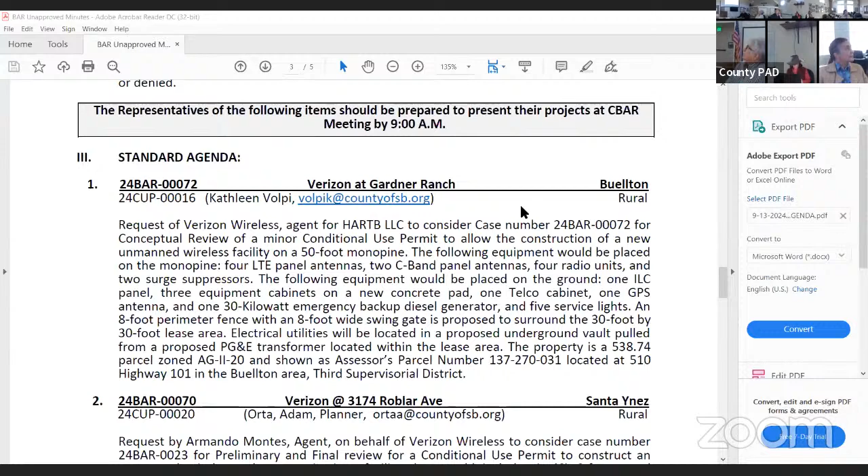Do we have anybody here for that? There's got to be somebody online, because there ain't nobody in the room but us. Armando, good afternoon, or sorry, good morning everyone. Armando's here, agent for the project. Perfect, all right, I will go ahead and kick it off.

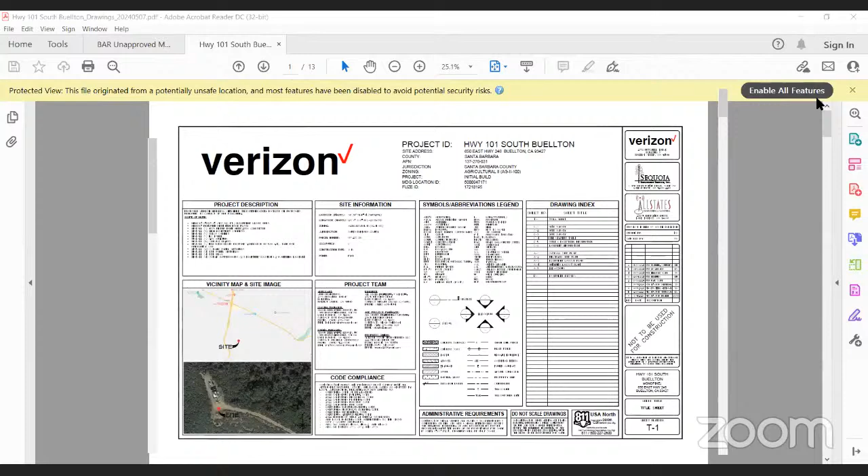My name is Armando Montes with Sequoia Deployment Services, representing the applicant Verizon Wireless. Verizon is proposing a new wireless telecommunications facility at 650 East Highway 246 in Buellton. The proposed project is located roughly at the southwestern portion of the property. Access to the site comes from an existing access road that begins at the northeast portion of the property and makes its way up the hill.

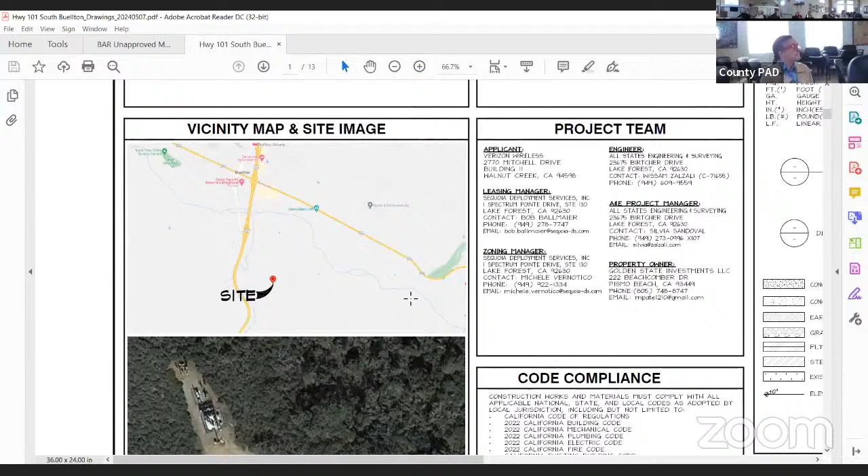The facility itself is designed as a 3-sector, 50-foot tall monopine that will sit in a 27-foot by 28.5-foot equipment lease area, securely enclosed by an 8-foot tall chain link fence. The objective of this project is to improve the overall network coverage and capacity in the surrounding rural areas. That pretty much concludes my brief presentation, and I'm open to any questions you guys may have.

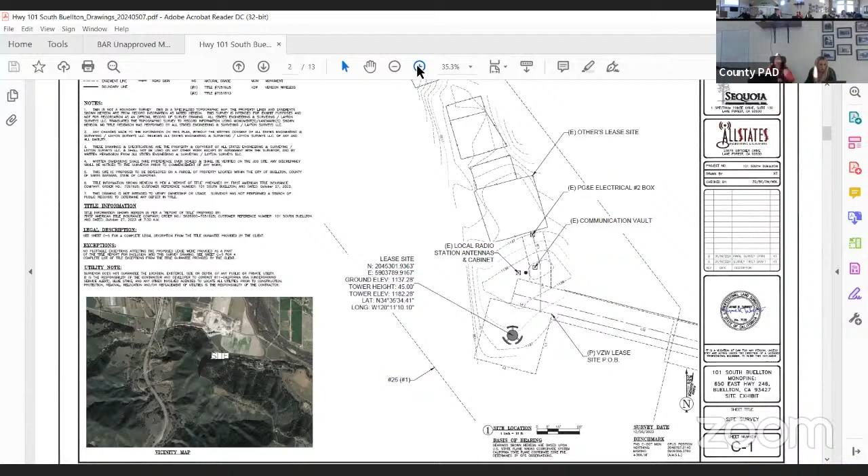Let's go to the different pages. On the next page, although the word 'site' is highlighted in white, that's not the actual site. It's hard to see the black arrow, but right there is where it's pointing out the site. Yep, okay, so zoom back out, and then that's good. And then go to the next page, and the next one, scroll down a little ways, and you get into where it is on the site, keep going.

There, so that's the access road he spoke of. Next is the actual site. Now there are other enclosures up here for other providers. Yeah, there's other carriers up on this hill.

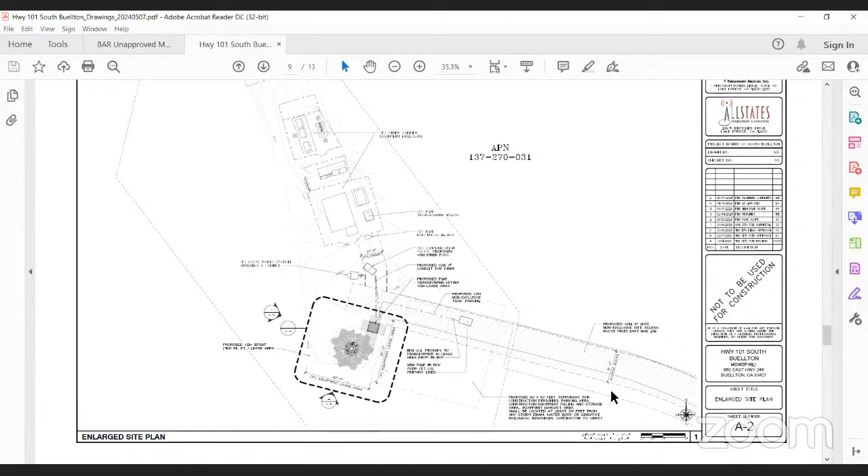And those are single poles, they're not a monopine, correct? Correct, yeah, they're more like a popsicle stick design, kind of, not a single structure monopine as this one. Okay, and how tall are those other ones?

I don't think we captured them. I want to say they're probably like 20 feet tall at the most, just going off of pictures I had seen.

Okay, and your structure to the very top, to the top of the panels, is like 45 feet, and then the actual monopine is 50, correct? That's correct. Okay, do you also represent the other Verizon project that we're seeing today?

Yeah, I am. Okay, so you're familiar with our comments about the fencing and the lighting and all of that? Because we're gonna have exactly the same comments, probably.

Okay, is there anything else? Do you have pictures from 246 or anything that shows the site, or any pictures of the site? We do have photo simulations we provided. I think most of those views are off of 101. And then we did have some additional site photos we provided. I think a couple of those did capture from 246.

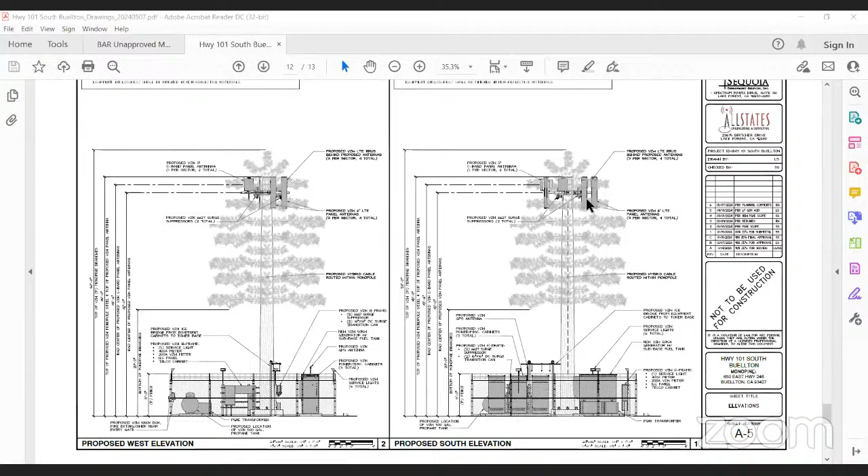Sorry to interrupt you. Is there any email address or someone I can email the sims and the photos to at this time, or is it too late? It's conceptual and if it is further information, we can look at it.

Oh, yeah, well, if you can, you can go ahead and send it to me, Armando. Okay, do you have my email address? Is this Teresa? Yes. Yeah, I have your email. Okay, send it to her real quick. Of course, just do that right away.

All right, so we're gonna temporarily table item number 1, and we're gonna go to item number 2, 24 bar 70, Verizon at 3174 Roblar Avenue. I'm just gonna give 2 shakes here, go ahead and get your stuff up.

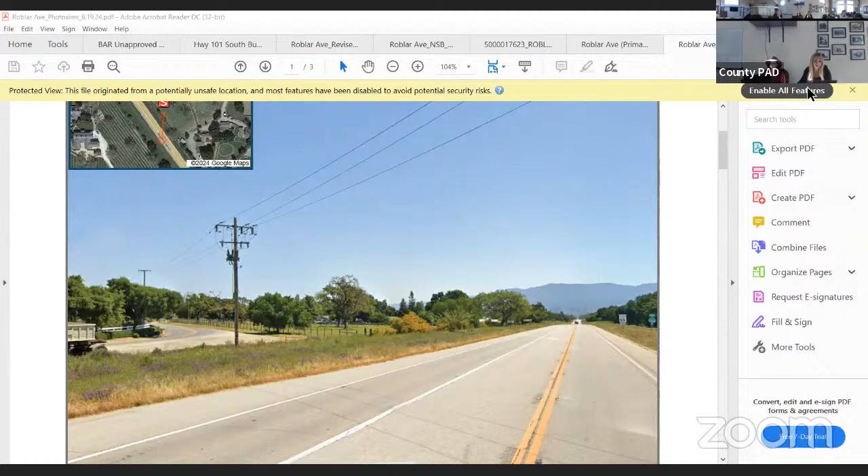All right, I'll look at this one. Okay, sir, would you go ahead and just address the comments from last time? Do you want me to read them?

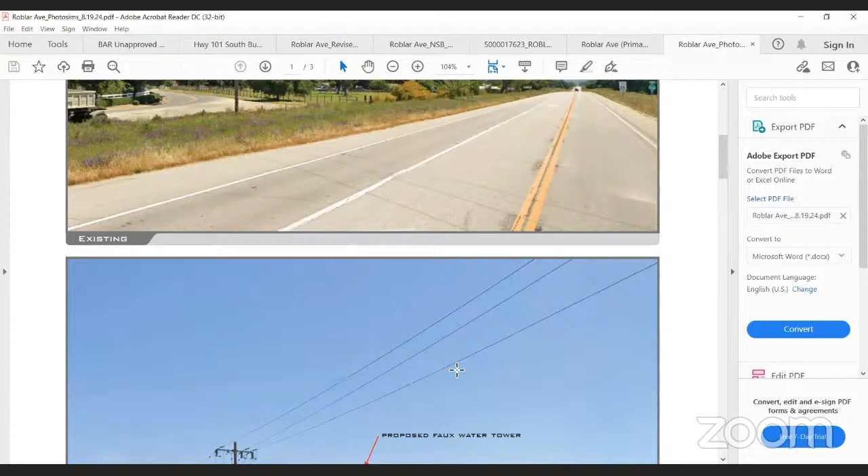Yeah, so I believe for this project, this is a faux water tank. The comments we received last time, BAR wanted to see a specific color palette, kind of break up the just brown that we had everywhere. So we incorporated some cast brown into the tank, like we had shown in some of our previous examples. Yeah, so you see the cast brown, and then I forget what the gray is called. It's on the drawings though. Okay, we'll take a look at the drawings in a minute. Okay, yeah, so we kind of broke it up, like I mentioned, different colors.

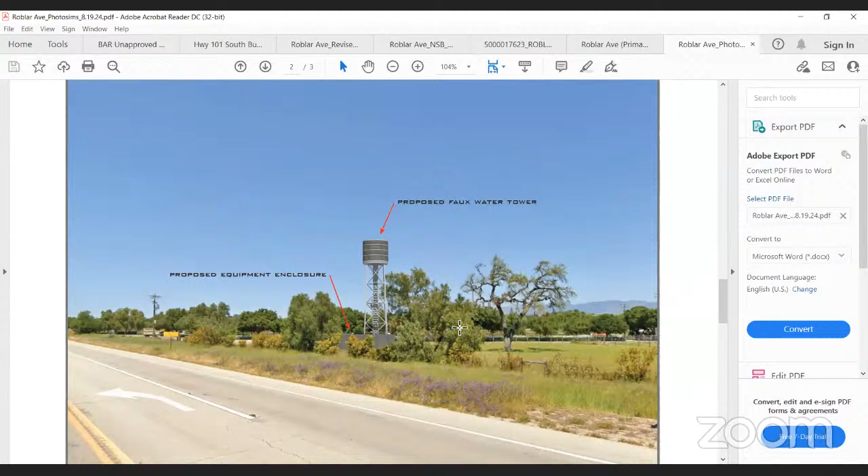The fencing, we brought down the lighting as requested, so it no longer protrudes to the top, it's all tucked in below. And we did look at the center pipe. I know there were some questions regarding that. We had our engineers design it as thin as possible, and I think we made a call-out on the drawings to ensure that, when it comes to actually selecting or ordering the equipment from the vendor, that we do go with the smallest possible piping in the middle, so it's not such a large contrast from the supporting legs. And yes, that's pretty much, I think, those are the main comments we had seen the last time.

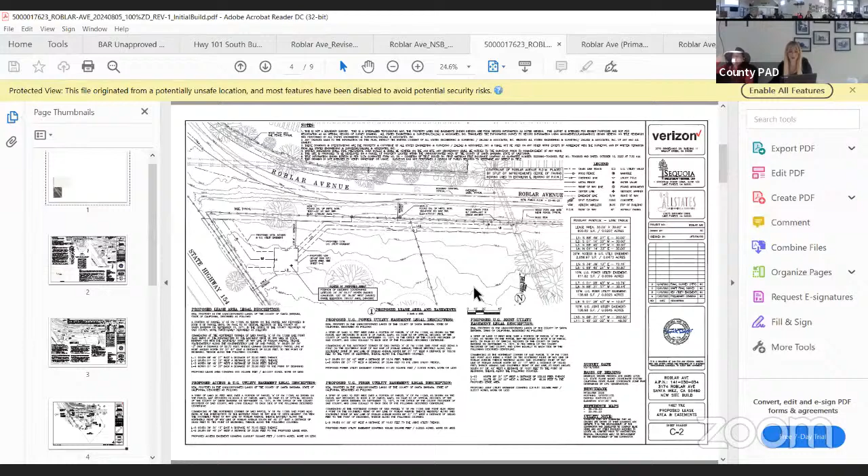Well, that was a good one. Okay, we can see where it is. Everybody's familiar with the site. Scroll down.

Okay, one more, and then go ahead and go to the elevations. Keep going. There we go.

I believe one of the other comments too was on the elevation sheet, you guys wanted to see what the fencing would look like, not make it transparent, so we could see the equipment, what it would actually look like at the site. So that's why you're not seeing any of the cabinets that are behind the fence, or even the lights, because we are bringing them lower. We asked you to show the fence post on the exterior and it looks like you've done that.

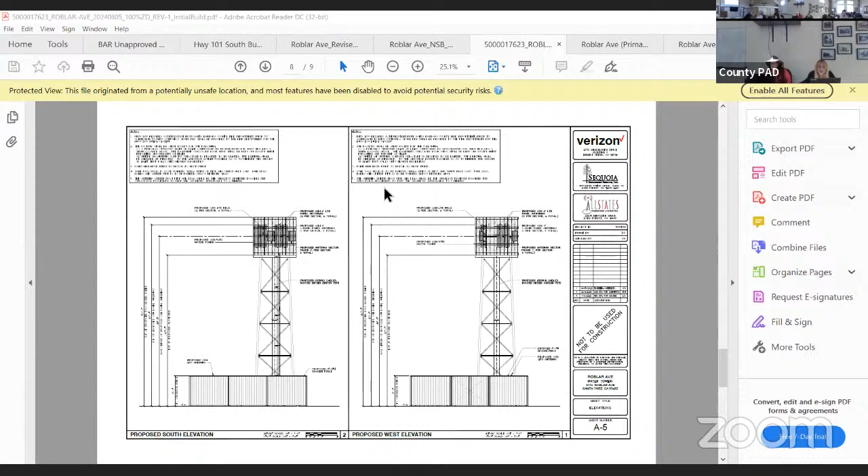Did you have rendered elevations or are those only in your sims? I'm sorry, what was that? The last note was, in addition to provided elevations, add rendered versions of the same elevations. Is that what you've done in the simulations? Yes.

And to be clear, it looks like the fence posts are on the outside in elevation, but not in plan. Well, that's a good catch. I think what they did was they just put applied something, planks on the outside to make it look like fence posts. Got it. Actually, and that's interesting, because that's the same hatch as what, it's like a line type. Yeah, I think that's just what it is.

So, yeah, can you go up to the plan? We have a quick question, do you have a detail of the fence? Do we have a detail of the fence? I don't believe we do. I know we called out this as being a wooden fence.

And do we call out the color of the fence? Yeah, we just called out that the new wood fence is gonna match the existing wood fence on the property, so I think we're still going more of a brown color there. Is there the wood fence on the property is not, it's post and wire. So you can't match it, unless I'm totally missing the obvious. That's true. Yeah, I may have misspoken on that.

Okay, so I think we need a detail of your fence and the gate. Do both at the same time, cause you're gonna need that to construct it anyway. And you see, looking at this plan, you see Andrew's comment about, it looks like there are fence posts on the inside. Okay, so you need to bring your plans into conformance, actually show where your posts are gonna be and how they're gonna appear in plan.

And then you need to call out what materials they are and what colors. This all goes back to comment number 1, which is need to see a materials board. So in addition to having your colors and everything called out on the plan, you need a board that just shows, this is the color, this is a paint chip sample for the color of the 2 colors on the tower. This is the paint chip sample for the color on the fence, if you're gonna paint it, or whatever you're gonna do with it. Your planner can work with you, so you know what a color board is like, because the color board will be stamped here.

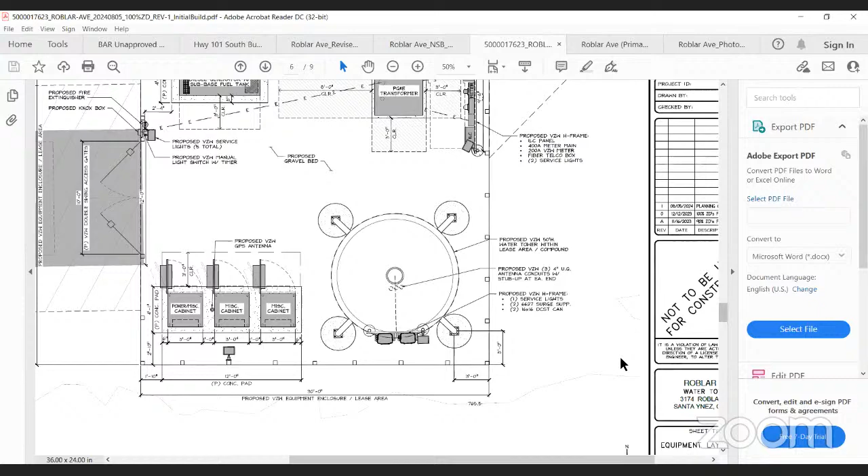There you go. Okay, so we'll have that color to review. On just note number 4, it says center pipe tank legs to be painted a network gray color. It's the same gray. Okay, so yeah, those color chips and all that need to just be put on a color board.

So talk to your planner about that, for your materials color board. We had a materials board we submitted last time. That's how we got the paint samples for the tank and the legs. I think the only thing we're probably missing is, you can add to it, and then take a picture of it and submit that as well. And that'll satisfy it for us.

And then we'll be able to see that. I think he should come back final on consent with the detail and the color board. Everybody okay with that? Yeah. All right, so I'd like to make a motion for preliminary approval, final on consent.

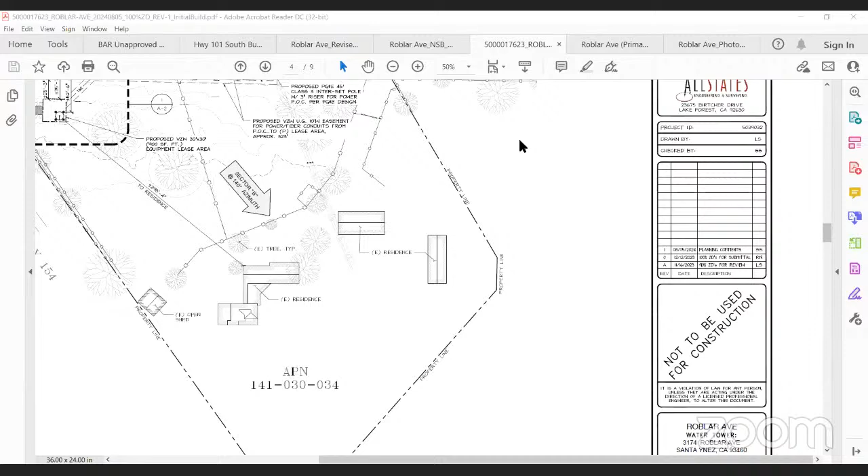Hey, yeah, Adam Orta from P&D here. Just wanted to point out to the chair and the board, we did call this application incomplete for a second time, and I just want to bring up a couple of things your board might be interested in or could speak to. As you can see, the project is quite visible from the north and southeast view from Highway 154. If you want to pull up the sim, Teresa, you can follow along with what I'm saying.

And so while tier 3 telecom towers don't necessarily require landscaping, county staff still have to make findings that these facilities are adequately screened from public viewing areas. As you guys already know, 154 is a scenic highway, so screening is particularly important for these facilities. So I just want to ask and bring to the chair and board's attention whether landscaping would be considered for additional screening. That's our first question, and two, along the lines of screening and placement from visibility from public viewing areas.

We also asked the applicant to better provide additional analysis regarding alternative site locations on the property itself. We think the applicant did a great job providing justification of why this site in particular was chosen. However, staff wants to see better explanation of why this particular location on the corner of the property was chosen. I believe in some of the materials the agent provided, this was preferred by the owner to have it in this corner of the property. But as I mentioned, it's a highly visible corner coming both from the north and southeast sides from 154. So I just wanted to bring that to the chair and board's attention for further consideration on screening. That's all I got.

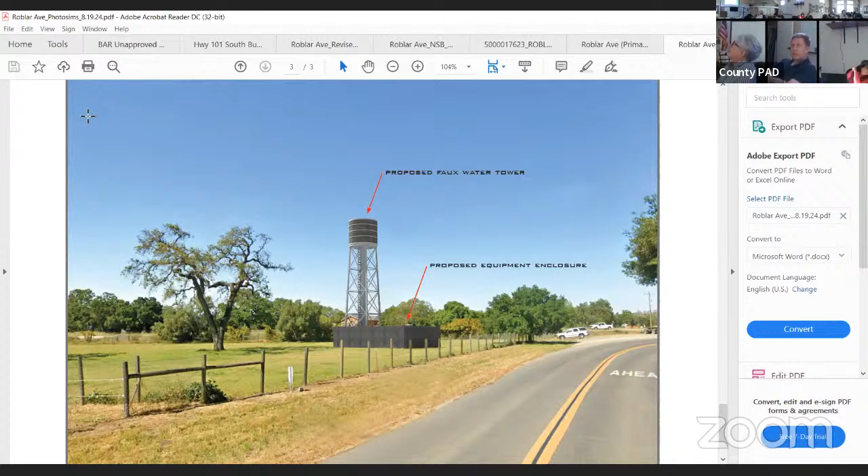Happy to answer any questions. So there's two questions there, and the first is additional screening required. Well, first the second question was alternative sites. Yes. So first I'd like to know what other alternative sites were considered. If you go to the primary doc. It's pretty extensive. Scroll down. And they were just eliminated. Yeah, there are a bunch of them.

So, Armando, you're the agent, correct? Hi, guys. Yeah, right. Okay, so this is the second question, which goes to alternative sites, and the first part was, in this document, you basically indicated that the red pins are properties whom you spoke to who didn't want this on their property. I think there was one that you couldn't come to an agreement with because the lease was too expensive. But other than that, they were all no's, is that correct? That's correct.

Okay, so within this parcel, can you zoom in on this? Let's go, yeah, okay. What is actually the parcel here? Is it the triangle, the whole triangle? No, it's bigger than that. What do I call this? Does it go all the way down there to the red pin and then down to the road and back to 154?

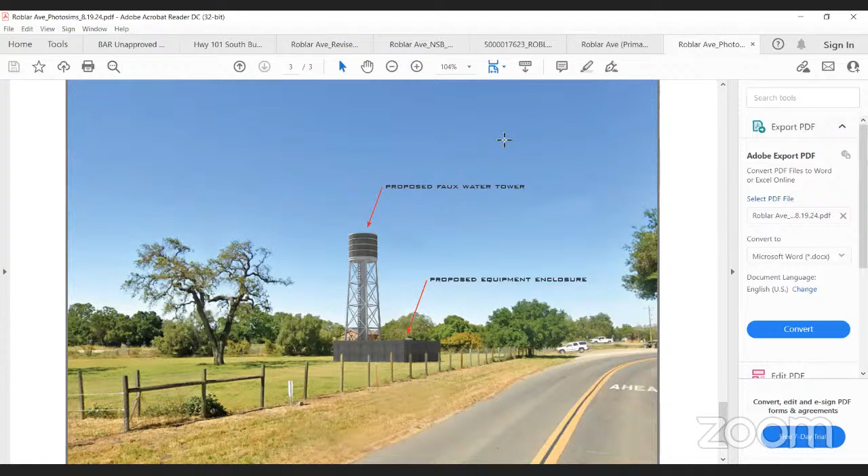Is one of your previous, yeah, we've seen this, it kind of looks a little more water-towery. Where is that, that was last time? Sample, yeah, it was in the photos from the material board we sent over, the digital material board. Yeah, I saw it on the submittal too. To me it looks more appropriate, like it's actually sitting on something, like it's really a water tank sitting on something.

This seems like it's not supported if it was really water in it. Well, the balance of the board didn't feel the platform fit what we wanted, because there was a note here that says one member thinks the platform below the water tank is desired as shown in the example. Like me, I think I was. It probably was, but everybody else was not hip on the platform.

It's just the proportions somehow. Yeah, it just seemed, but I'm okay with it as it is. Just, we'll go to the materials board. There isn't one. Yeah, there is. What's the diameter of the tank?

Just real quick, we have photo simulations, we have plans, we have the alternative sites mentioned, and we have some pictures there from the site. Right there.

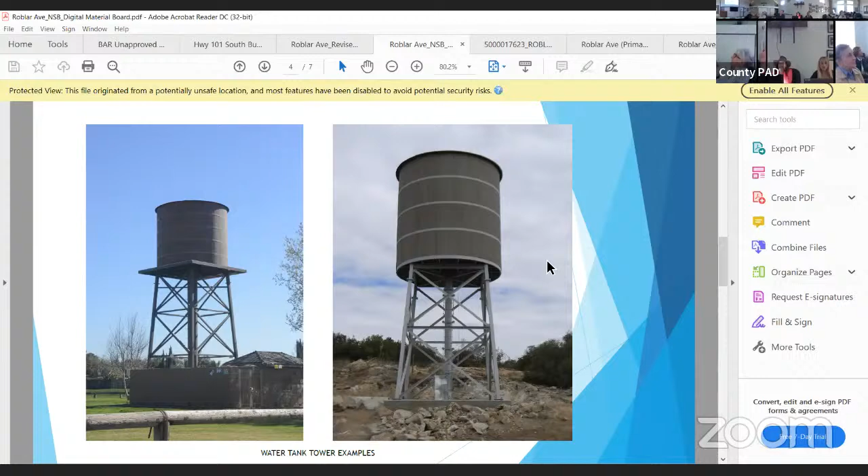Yeah, well, but even the one on the right, see how it hangs over? Yeah, that's what I'm talking about. But if you go to the elevation, it does that. If you look at sheet A5 on page 8, it does that.

Oh, it does do that. It doesn't come through in the photo sims, but it does in the actual drawing. Yeah, they didn't do it the right way in the photo sims. There we go, ah, okay, yeah, then I have no problem with it. We're good then, if they build it like that, the actual drawing. Okay, so the photo sim look is a fallacy, all right, discard the photo sims.

Okay, so we've addressed Adam's comment. Adam, I think we addressed the comment, we don't think we should add additional landscaping that's, in our view, probably going to die. Okay, that's no problem, thank you guys. And as far as alternative sites on this property itself, we don't really see a standout alternative based on what we have before us.

Okay, great. I just wanted to bring those two to you guys' consideration. I appreciate it, no worries. And thanks for asking.

Back to my motion and the fact that they need to come back. If we follow through with the motion, they would need to return with the color board and all colors called out on the plan, and the plans need to match the details, which they're also to provide for the fence. Very nice job on lowering the lights and changing the colors, that all looks good. So that's what you need to come back with.

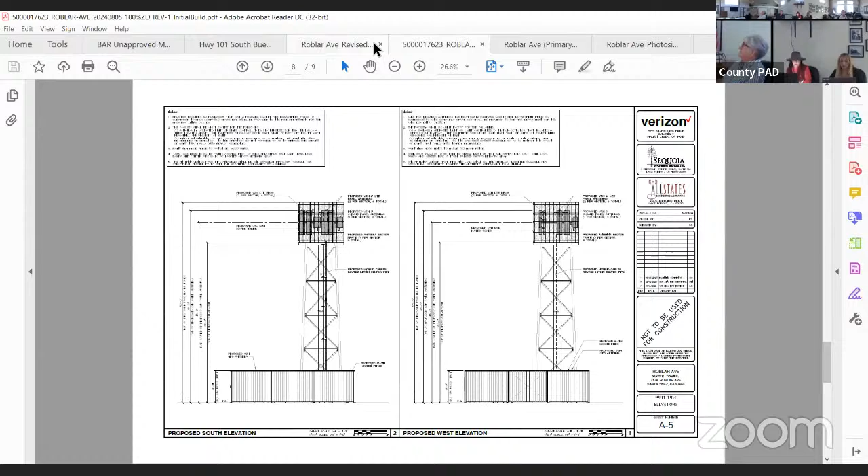more agrarian style fence, or is this acceptable? I think this is the minimum of acceptability. Just look at some solid wood fences and agrarian styles and see what they can do. This would be just fine if they detailed it, with the posts, making sure the posts show on the exterior. They're gonna need bracing on that gate, so whether they make it aesthetic or it's all internal, it's up to them.

So whatever they come up with, we'll look at. Okay, thank you. So, going back to item number 1, did you get the email? Which is Verizon at Gardner Ranch.

Okay, Armando, you want to orient us here? This first view is from 101. As you see right here, top photo, existing, and on the top of the hill, those are the existing cell sites right there, the antennas.

Okay, scroll down a little. We rest our case, we have our lonely tree on top. No further discussion needed. Is this the only thing he sent you?

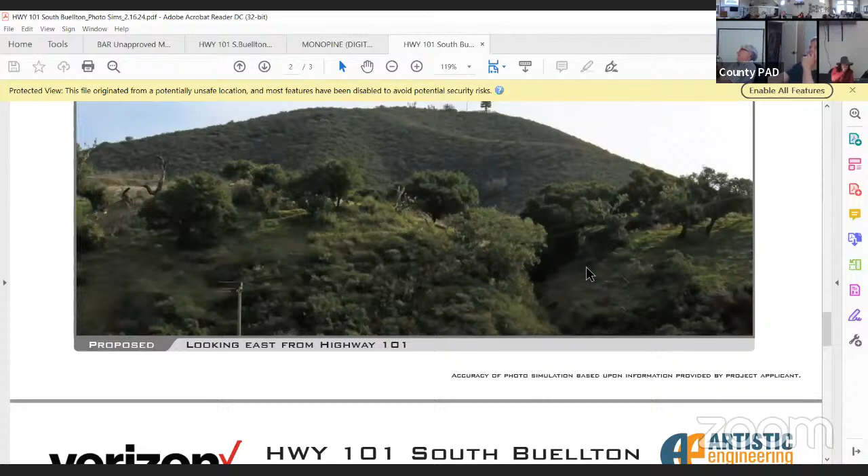Also from 101. Yeah, it's just like, oh man. You want me to do what? Why am I doing this? Okay.

I'm interested in what it would look like from 246 as well. And I'm a little interested in how this interacts with, it's from Highway 246 East, so you can't see it, that's the entrance though, right? Yes, so that's the entrance, it zigs all the way up, we're that hill in the far distance. I think it's probably why we didn't provide sims from 246, just because it's so far.

Yeah, it's pretty far away. That doesn't look like 246, that looks like 101, where is that on 246? Let's see here, I don't think I had a map legend on this. That's definitely 101, you don't have one-way signs on 246, it's not a divided road. Yeah, it could have been mislabeled on our end, so I apologize for that.

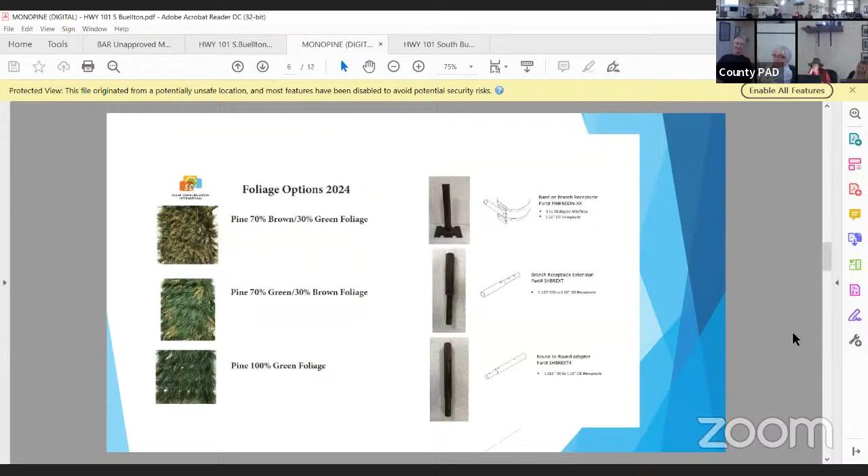Yeah, we're looking for a regular pole. In this case, we don't want it to look like a telephone pole, so we don't necessarily want it to be dark. I think they might be better off going with some kind of neutrally colored, anodized gray finish. We've usually done galvanized, non-reflective.

But we're gonna want samples of the material on your sample board. Basically what we're looking for is non-reflective or as non-reflective as possible. We usually put a detail galvanized with a low finish. I could bring examples of what that would look like. I'm trying to think of a material word for that - might be a little difficult. We'll look through other sites we've built with that detail and present it.

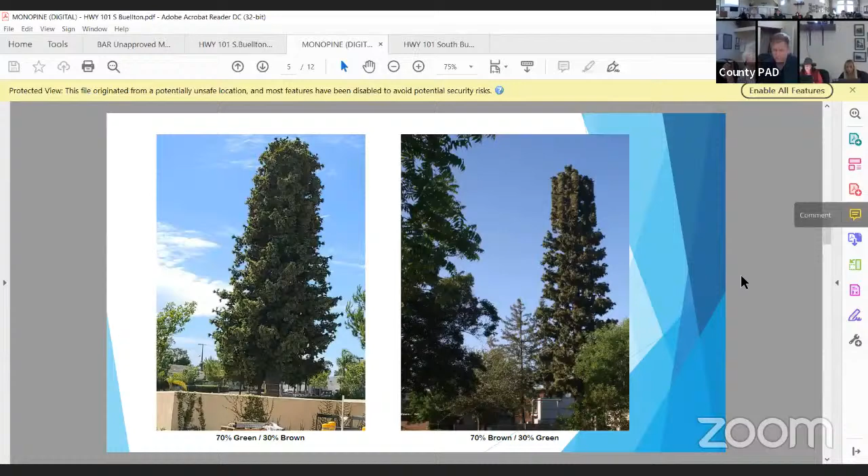Okay, can we look at the site plans on this one? And the galvanized fence was okay with everybody and everything.

It would be nice to know that the lights were on a timer or some other motion sensor, since you get deer and things going by. Everything on the interior, not just the interior - the lights, yeah. But no deer going inside. Motion is usually only set for a certain amount of time, so we should have a note on the drawings mentioning the service lights being on a timer. Okay, that's fine, that's mostly what I wanted to know. Okay, that sounds fine. So we're good with everything else?

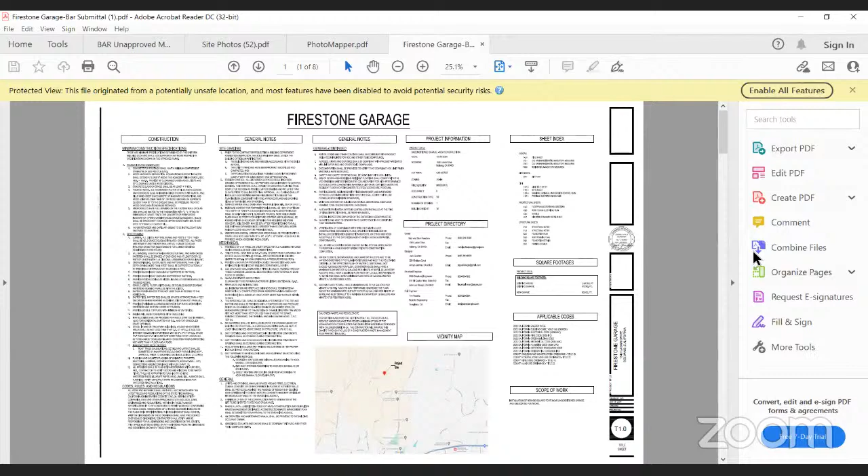We are proposing a detached 960 square foot 3-car garage next to their existing garage and residence on their 5-acre parcel. The garage is about 15 feet in height from looking at the elevations. You guys have the drawings? Okay, we'll get there in a sec. You're talking about right in here, right?

That's correct, yep. Okay, so go to the drawings. That's the site photos. Oh perfect, start with that. I didn't know if you guys got sent the photos or not. So the garage is going to match the same materials, roof, walls, same garage doors, everything to the existing garage. It's just essentially additional vehicle space.

Go to that next photo we were just at, right there where the white truck is - it's essentially sitting in that spot, 90 degrees to the existing garage, sharing the same drive entrance at both spots. If you pull up my site plan, you can see clearly how that lays out.

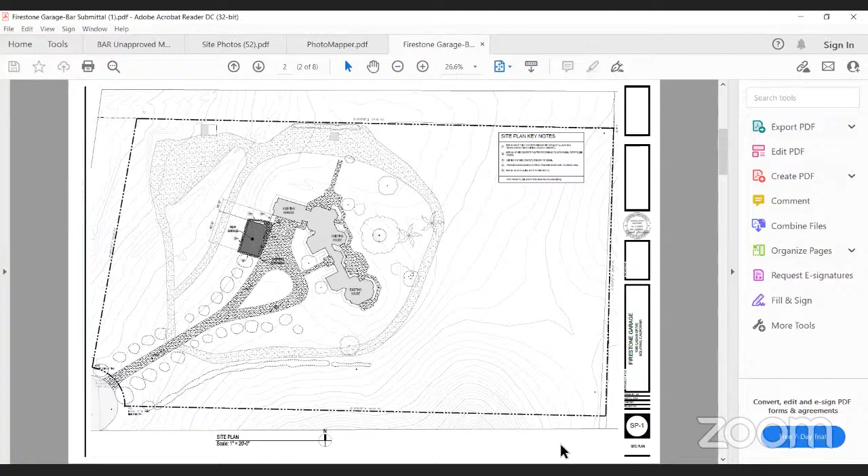If you go to the next page, it shows the elevations. Shows the heights there from finished floor, and the average height from the ridge down to median grade is 15 feet. So that 16 foot is maximum height from the front.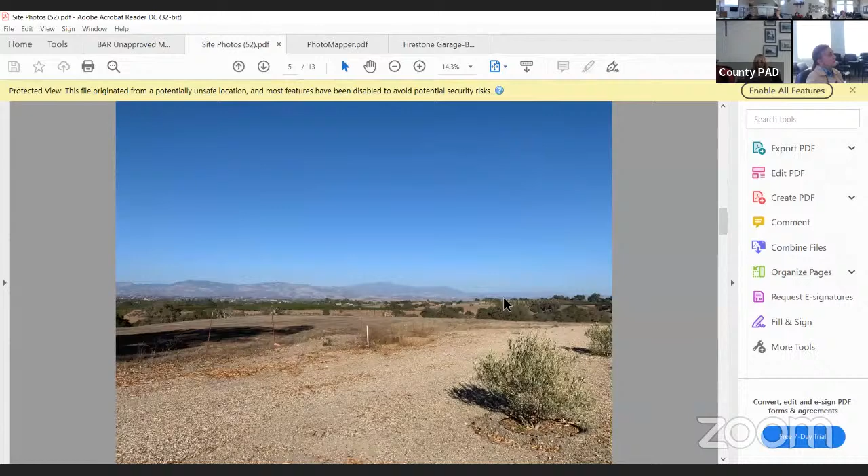And then just the photos again, the site photos. See that white truck on the left? That's about where I was gonna go.

Yeah, it's gonna get pushed back into the hill a little bit, so it maintains the same height as the existing garage. Then there will be an integrated built-in concrete retaining wall that's a part of the building itself, that will retain the dirt around at the back and along the two sides as it slopes down to the driveway.

And could you go back again to just the view, the site photos with more of a view of that? So Josh, is that where the garage will sit, kind of where the gravel is? No, that's a different part of the site.

That is, if you pull up, yeah, you can see that's down by the playground. So if you pull up the site plan, that is along the back side of the house, on that flat area that you see behind the garage. Oh, it's over there, that's back there, yeah.

This area, yeah, that's a good shot right there. It's essentially going where the mulch is. Where the mulch is, exactly.

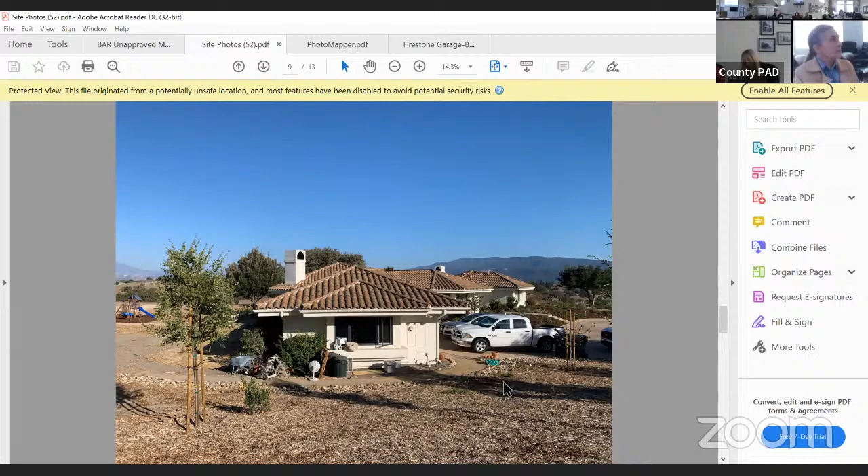I think I've got it off there by the distance from the house. This goes straight on, 16 feet off the face of that, or off the corner of that. There's some good, right? Okay.

So as you can see, the grade rises up a little bit there. We'll just tuck that in so it sits low. So it's just to the left of the trucks there, turned 90 degrees to the existing garage.

Right. Okay, thank you. Looks like there's a tree, a newly planted sapling right in there that might need to be moved. Yeah, that's 18 feet, so.

Yeah, we'll be moving all of those. I think there's 2 or 3 of them there.

Are those, what kind of trees are those? They're not native trees, I don't have the species. They're actually not doing very well at the moment, but they're the same tree that you see there to the right of the car, planted right up against the house. Ah, okay.

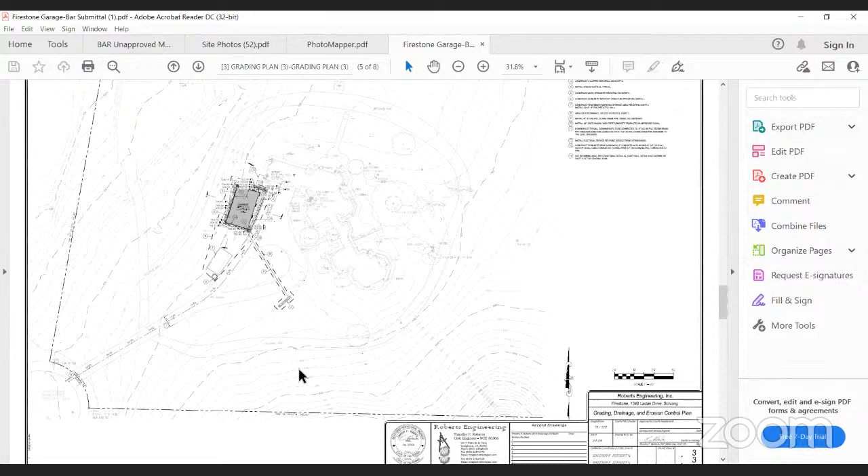I did have one question, because I noticed you don't have any lights on the garage. There are going to be lights installed. One thing that didn't get updated on the plans in time, it got updated on the planning documents but not on the BAR document, is I did switch out the light because the existing light fixture they have on their building does not meet the dark sky compliant.

So I did find a fixture that met that, and I put it on the planning documentation per Tatiana's request, but I don't think that got transferred over to your guys' set. So your note is now going to read: all colors, materials, and detailing except proposed lighting to match existing. And then you need to put the light fixture on the plans when you come back to us.

Okay, and you need to show them on your elevation and your plan view and identify them. And then we need a cut sheet that shows what it looks like. And you need to note that the lamp needs to be, we'll probably look at wattage just to see how much you've got.

But basically what we're looking for is 2,700 Kelvin for the temperature on the bulb, and that's part of the dark sky compliant stuff. And we're looking for less is more.

You're looking for, sorry, what was the last statement? Well, like on this elevation here, you could put... I've seen people come in with elevations like this and they have four lights on it. We're looking for you to do fewer lights.

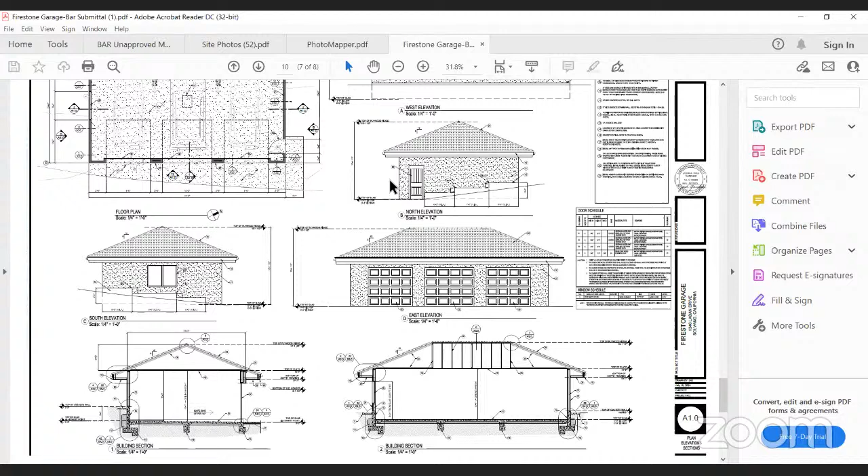Yeah, that's a garage. Yes? Okay. Yes. All right. We're looking for you to come back to us preliminary final full board, okay? Sounds good. All right, thank you very much. Thank you. Thank you. Thank you.

23-BAR-00160, new single family dwelling.

Good morning. Morning. All right. Hello. All right. So my name is Rory, representing Foubister Architects and the Moore family. Okay, let me see if that's working now. Perfect, you can hear me. Okay, so thank you so much for your time.

This is our second concept review since the last hearing, which was a couple months back. We've made significant progress in terms of vetting the design and fleshing it out with the full design team. So if it's okay with you, I'll just give a quick introduction to the changes.

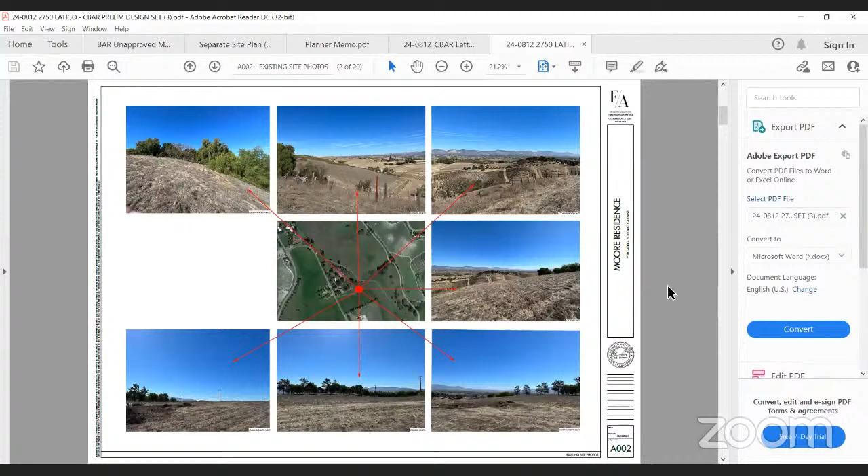Even though we called her back. So I'm gonna, before you get really truly rolling here, I'm gonna go ahead and read the comments from last time real quick. Yeah, please. And then if you could orient us on the site location so that we're back to... Absolutely, yeah, so that's gonna take a hot minute to load anyway.

The second story of the garage feels out of place and should be eliminated, given that the proposal has glazing on all four sides. We prefer a more earth tone color palette. A gravel driveway may not be desirable for an avid car collector.

The amount of glazing appears excessive and should be reduced. In the Santa Ynez Valley, this amount of glazing would lead to extreme light in the mornings, high heating and cooling costs, and light trespass reflectivity. Summers in this area are very hot. Find ways to add shade.

The site is very windy and the water will be blown out of the infinity pool and reflecting pool. Water is also extremely limited. With regard to the pool, reconsider the size and use of an infinity edge in the context of resource management. Large bodies of water will need to be considered in the WELO calculations.

Consider the accessibility of the site, number of stairs, and include handrails so that the property is usable. A site visit will ultimately be required. Work with the planner first to flesh out any remaining issues.

Okay, so, brilliant, where we are, we're, Latigo Drive. All right, ready to roll? Yep, brilliant.

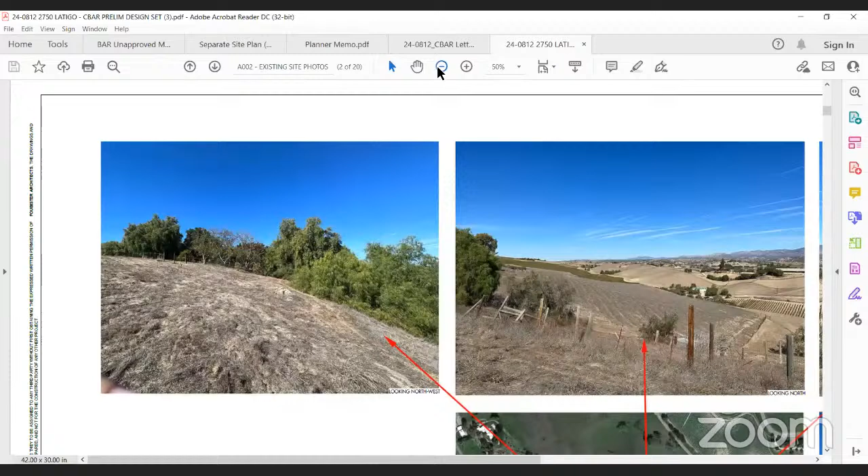So what I would like to start with is sheet P100 if possible. And that's the landscape site plan, just to orientate where we are on the site and how we're operating. So it's a couple more sheets just after A002. There we go, that should be the ticket once it loads in.

Okay, so there's obviously quite a lot going on this sheet, and I just want to orientate the different buildings, the different landscape plan, and some of the methodology and thoughts behind why it's been designed this way. So the street access is right at the bottom of the screen, running left to right, and that's going to be the main primary street. The hill falling away to the backside is where you'll see a word that says vineyard falling down the hill, and that's where the hill is rolling down towards the creek.

Okay, so the primary components of the previous submittal are still very much in play. We still have the main residence in the same location. So let me see if I can highlight that one actually. I don't know if I've got annotation ability on this one.

Do you see annotation, Kendall? Rory, this is Kevin, I can do this. Oh, fantastic, yeah please.

Oh, fantastic. Okay, and then the ADU portion is to the left, so that's actually going to be where the existing house is located currently. And then we still have the detached car collector barn down by the bottom. And then there's a couple new components to the program which have been added, which is more of an agricultural element. There is a new agricultural barn and pasture, along with, as we kind of flushed out the design, obviously trying to make this a fully developed proposal.

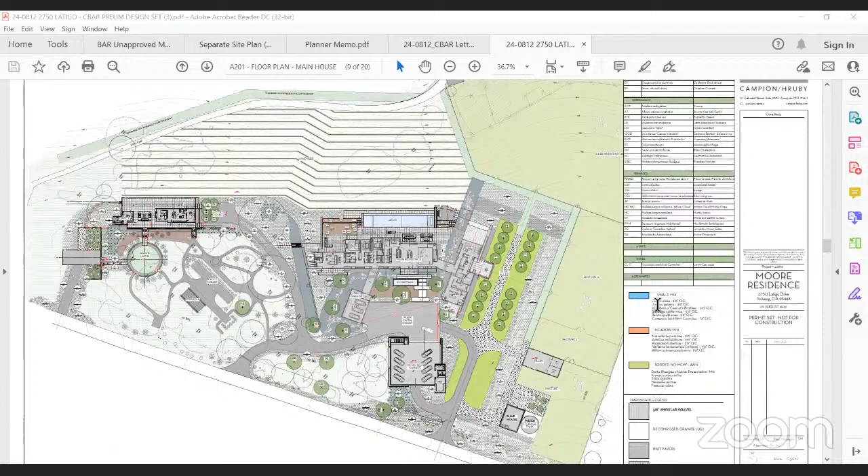Just to regain the bearings, the north direction—if you scroll down a smidge on the sheet, there's a north arrow to get your bearings of where we are. Yeah, it's here, perfect. So that's just getting your bearings of where we are.

I'd love to move through some of the other comments, unless you have any off the cuff. If you can just be succinct and move through the comments, that would be great. If we have questions, we'll ask you in a minute.

Comment 2 was preferring the earth tone palette, so we did add a material palette sheet, A801. The palette we're proposing has soft and tactile qualities.

We're using Kynar black for the steel frame windows and doors instead of all glazing. We have elements of Corten planters, an ancient Turkey white rubbled stone mix—I don't know if that's able to show up, it'll show up shortly. We're still proposing some stone floors for the exterior, and one of the landscaping components is a mix of gravel and pavers. The smooth trowel stucco is an earthier tone, a dove white, but we're certainly open to looking at that.

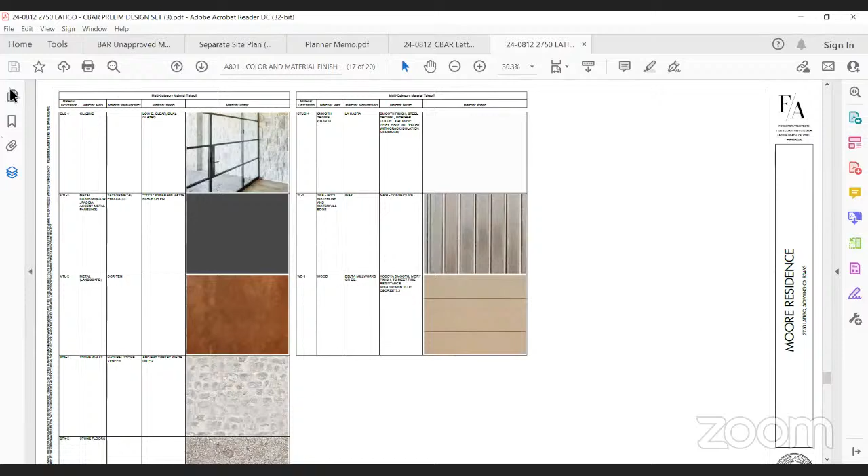Obviously this is just at a concept level, we're happy to look at that—there we go. We got there now. The stucco color didn't come through, but it's got a bit more earthy tone to it. For the pool, we're utilizing olive for the waterline tile and waterline edge.

The wood is an Accoya smooth ivory finish to meet fire resistance, which is highly important. We feel confident this material palette has tactile qualities so it doesn't feel like an alien spaceship landed on top of the hill, but is in keeping with the site, the materiality, and the local architectural vernacular.

Next up was the amount of glazing. Like every project, we're trying to maximize the views, especially on that northeast corner. I'd like to look at sheet A802, which is the next sheet along. So that's 802, there we go, perfect.

Here you'll see a sun study analysis. The glazing is directed in the northeast fashion, and we've used the roof overhangs to provide maximum coverage. The majority of the glazing is in shade from June to December, in both a summer and winter study, and really only around December 8 a.m. is when you get any light hitting that glass.

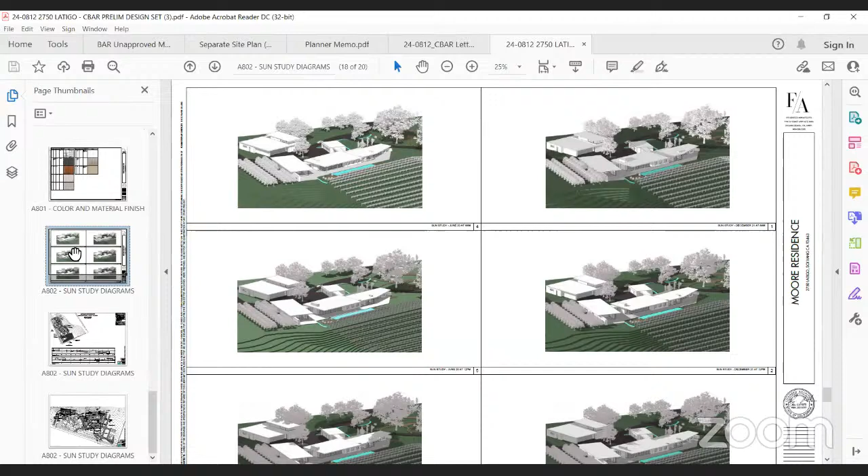Item 6 pertains to the wind and the infinity pool. We obviously want to maximize the length of the pool. However, if you turn to sheet A101 or 102, the pool depth has been varied. Instead of having a deeper pool at the full length, we've added a 25-foot Baja shelf limited to a maximum of 18 inches deep. That drastically decreases the water volume. It still gives the appearance of a longer pool, but the volume is drastically less than previously submitted.

Next up was item 8, the accessibility for the site. Love that comment about making sure the Moore family can stay here forever. So some of the things we've done is try to work with the site and mitigate grading. From the attached garage at the main house, instead of having stairs down to the main residence—I don't know if it's possible to zoom in on A102.

From the main garage, attached to the main residence, you can see it there. Previously there was a set of stairs, so we want to keep the attached garage finished floor higher than the main residence, again to mitigate the grading on site. But to avoid a series of stairs, that bridge element you can see tagged there is actually going to be a ramp. So that ramp acts like a true bridge over the water feature below, but ensures the family have full accessibility to the residence.

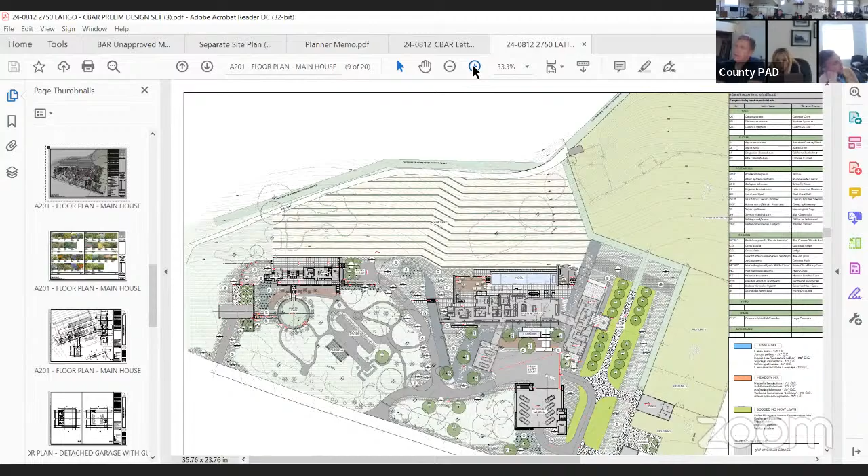Thank you. I've got a question about the bridge. Is the ramp from the garage only expressed on the interior, or does the actual roof slope down to the main house as well? It's only expressed on the floor. The roof would be nice and flat and plain with the other roofs. Got it. I had trouble discerning that from the drawing, so thank you.

And I think the plan we're looking at right now is showing a small flight of stairs, and that's been altered in the architectural plans. Yes, that was a remnant left over from the previous iteration, but no worries.

I'm just clarifying. My other question is, have you done preliminary well calculations? We have, and we've also been speaking with the water master to ensure, from Mark DeBosi, I believe his name is, with regards to what we're going to need. Obviously, it's a larger residence and compound, so we understand that water is a finite resource, and how we can ensure that we're not drawing too much from the neighborhood. So that's part of the process that we've already been working with Brett's team, with the water master, and then obviously with landscape. I believe the MWELO has already been started and will be ready for the next hearing, for the prelim hearing.

Okay, beautiful. Yeah, it's probably a little overkill, but we wanted to give you all the information up front, just to make sure, just for concept, that we answer any questions that you might have. I appreciate it. Thank you.

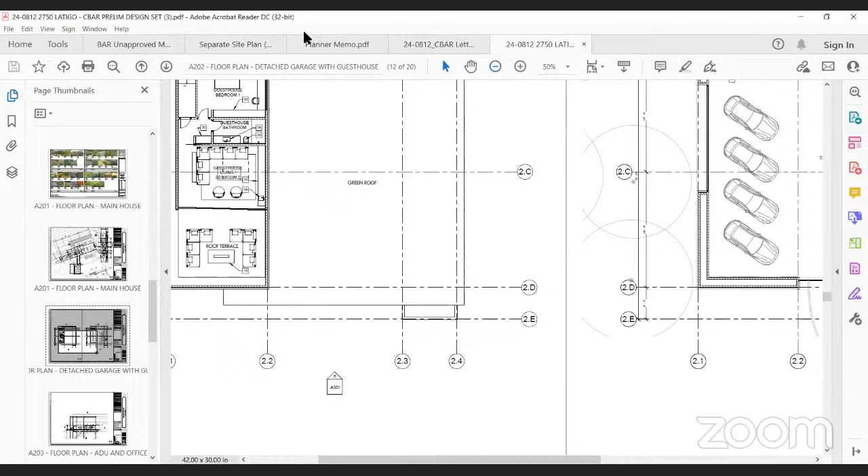Yeah, so it's going to be on A301. From the road, and obviously that's plus or minus because the road has got a slope on it. It's going to be sheet A301, section 3. So one sheet up. That's too many sheets up. I apologize, next.

It's always the sheet you're looking for. It takes an extra 2 minutes to open. There it is, on the left-hand side.

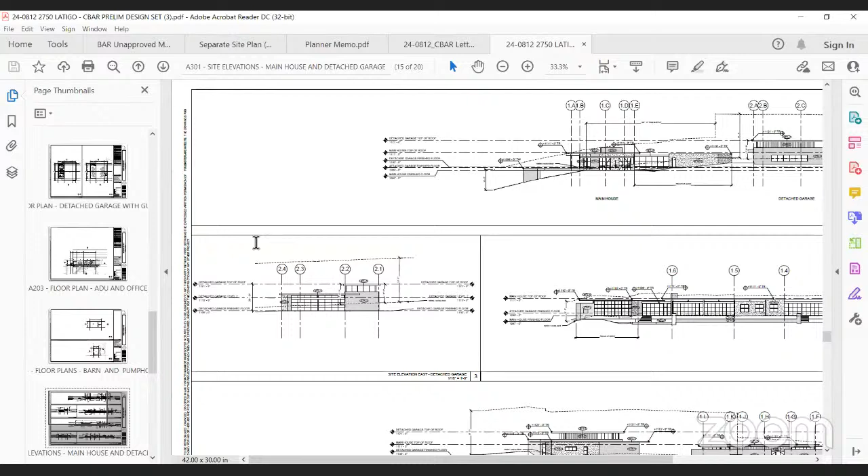Three up. There's this section kind of showing the two-story component. The dashed line indicates the natural grade. This is the worst case scenario where the excavation occurs, but just to show you where that is relative to the street. Great, thanks. Yeah, absolutely.

Could you go back to the site plan? I really like the way you have those cool pathways around the ADU, so the site looks like it'll be well used. Opportunities to stroll around, I think that's really neat.

I'm just wondering about that turn into the garage, how it's kind of a hairpin, that might start getting a little old for the owners. It looks like a tight turn. Not the big garage, but the little garage, the main garage. It kind of seems like a tight turn.

And the only other thing is with the colors, it's a really lovely design, but the colors still seem pretty bright to me, and reflective. That's just the stucco colors.

Okay, and if possible, might I ask, we'd be happy to, I'm looking for an excuse to drive up there with my wife, so maybe we could bring the material board with us, a physical palette, to show you at the next hearing. Could you go to the color board, you guys? It just seemed like it was almost white to me, and this one.

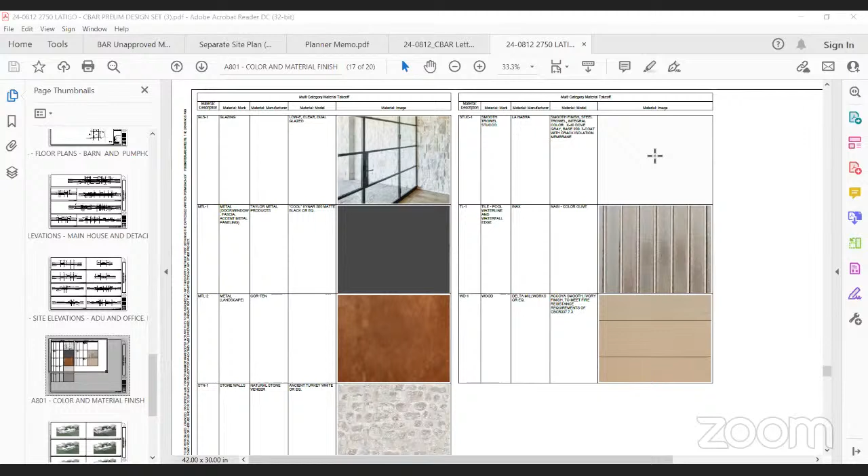And the only reason I'm doing this is because it makes sense to kind of do everything in one big bang, so that we don't go out there and have our site visit and go, oh, you need a story pole now. Yeah, no, it's hard to envision when there's shrubbery and this and that. I totally understand, it's a lot of site. Okay, fantastic.

I don't know, I'll get with Adam and talk to him, and then if you want to coordinate with Adam, but it might be most expeditious if just two of us went out. You want to go ahead? I'm fine with that, yeah. Is everybody okay with that? Yeah, Andrew and I? Yeah, we're good.

Okay, so Andrew and I will get together and go out here and take a look at it. And then we'll coordinate with Adam and let him know when we're gonna be there and whether anybody else needs to be there or not, but we have your permission to go on site. I'll double check with the owners, but yeah, I can't see any issue why not. Okay, if there's an issue, let Adam know as soon as possible so that he can tell us. Absolutely, yep, okay, great.

All right, so you'll wind up returning probably, I'll talk to Adam too, but it's at least further conceptual with a site visit. And then depending on where Adam is in the processing, we'll determine whether they come to preliminary or not. If I might, is there any way of moving this more towards a preliminary hearing? Well, that was what I was just saying, is that if Adam is fine with it, I think we're probably fine with a preliminary.

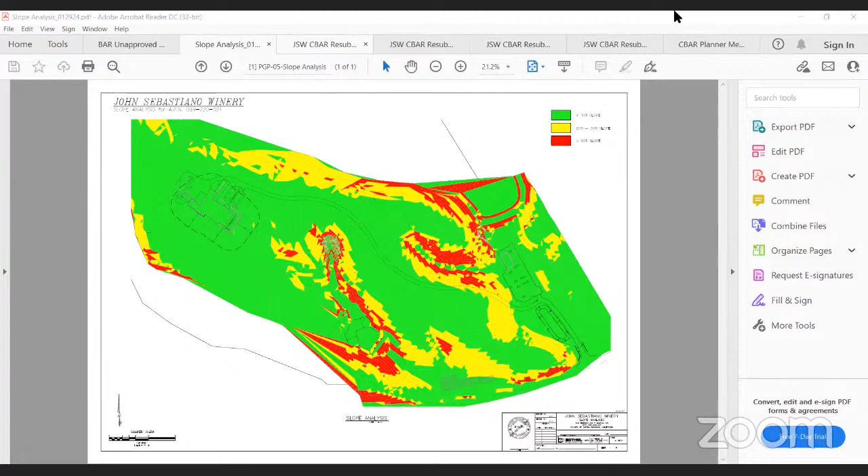Okay, hi everybody, this is Pam with Taylor Lombardo Architects, and just wanted to let you know that in response to comment number 3 regarding reducing lighting at the west side, if you reference sheet A6.01, part of the architectural set I believe. Is it A6.01? Yeah, there. Okay, so at the west facing wall, we reduced the amount of wall sconces at the terrace outside those 2 private tasting rooms.

There used to be 3 wall sconces there, and we've reduced it down to just 2. Also, the break room terrace, the amount of wall sconces there has been reduced as well. There used to be 2, and now there's only 1. In addition to that, we also took a look at the amount of lighting at the terrace outside the tasting room, as there was a comment about possibly not having a balanced light output on the building. So we have reduced the amount of lighting there by 25%.

And then we have also provided a photometric study, which we have called Exhibit 6. I'm not sure, I don't think it's part of the architectural set, but it might be, maybe it's at the end. There's an Exhibit 6 that we provided. Oh, no, it isn't.

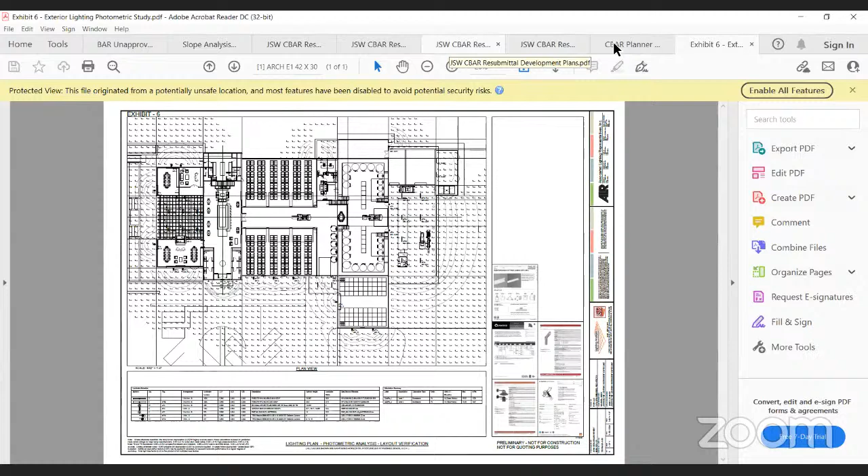We'd also like to point out that the light fixtures wattage has been reduced from 10 watts to 7 watts in order to mitigate that, and we have sheet PL-1, the landscape sheet, where we're also showing that the path lights along the west side of the production area were removed.

So if you zoom in to the west side of that building, you'll notice that there's really not much lights on that side anymore. We only have path lights that are facing the building, not facing the highway.

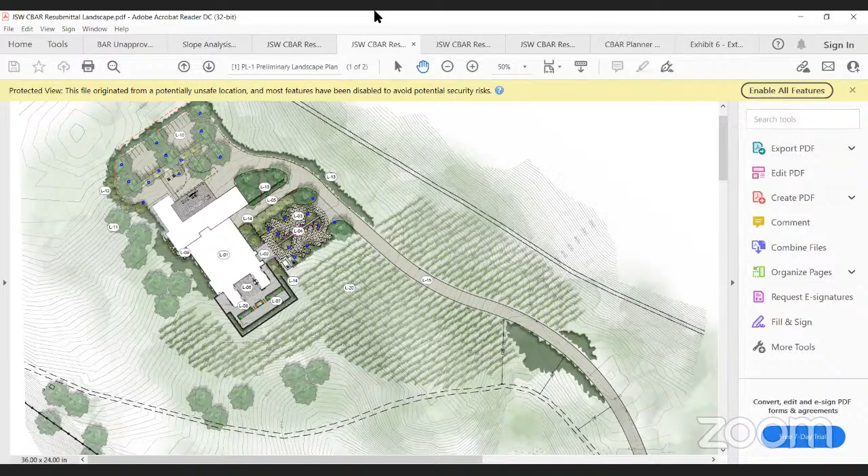We provided a stucco sample. I'm not sure if you guys have it there with you, but there was a comment about our stucco color needing to be darkened, and the colored elevation we're showing on sheet G0.01 is a little misleading because it's actually lighter than what the physical sample or the actual stucco color would be. So we provided the physical sample for you to look at.

I would also like to note that the material board was approved back in the July 2023 CBAR meeting, and since the stucco color is the only item in question, that was the only sample that we provided for you today.

Okay, well just so you know, there hasn't been any kind of approval. All we've done so far is review. I know it's a simple semantic thing, but words carry weight.

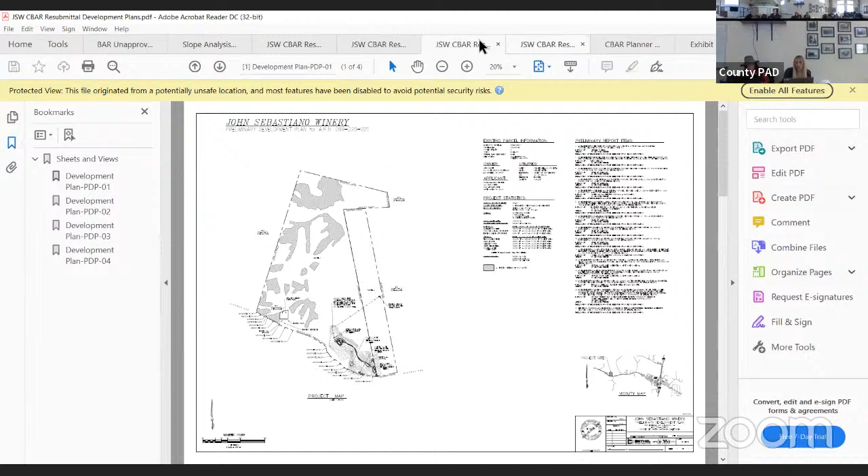Okay, and thank you for the sample. You're welcome. And is this the sample as previously proposed, or is this changed? It's the same sample, but the colored elevations on the renderings are a little bit misleading because if you put it next to the digital file, it's much darker.

Yeah, that's why we like to see that. I think item 8 said provide colors and materials information at the next meeting, and I think that meant all colors and materials was what we were looking for, but thank you for submitting the sample, that's important.

Does that conclude your presentation? We also wanted to point out that we also provided a photo of the samples that we had shown back in July 2023. I don't know if you guys have that. Is that in the exhibits folder as well? That was emailed to Tina.

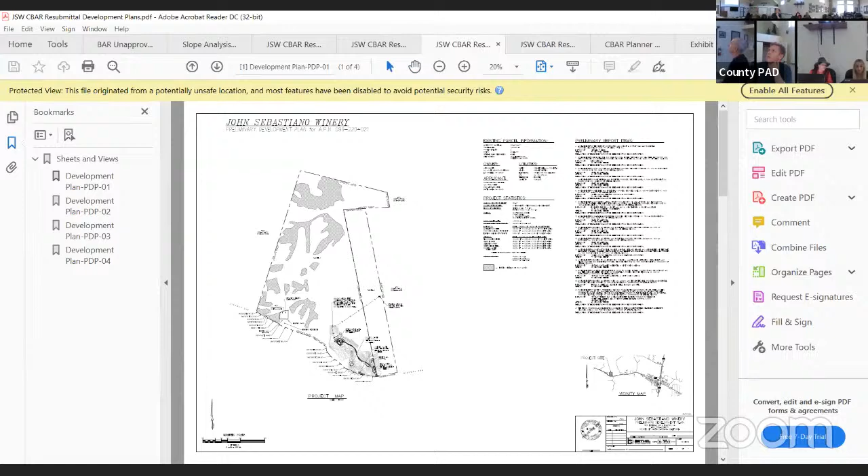With the exhibit. Exhibit 6. When you zoom in on that, did you look at the numbers on the terrace? Yeah. Okay, like I said, I'm totally the only one at this point.

And the second you get off the terrace, you're at 0.2 foot. Yes you are, and it's actually that disparity that bothers me, because it's similar to being close to being inside almost.

There's some 10s and 8s in foot candles in there, and I think that if you're moving from one place to the other, it's not much of a transition. It's very much like being inside.

And that's my comment, but I'm willing to let it go. They did the big moves, which is what I wanted, we're okay with that. But like I said, I'm probably the only one that still feels this way, so. Okay, yep, so they're here.

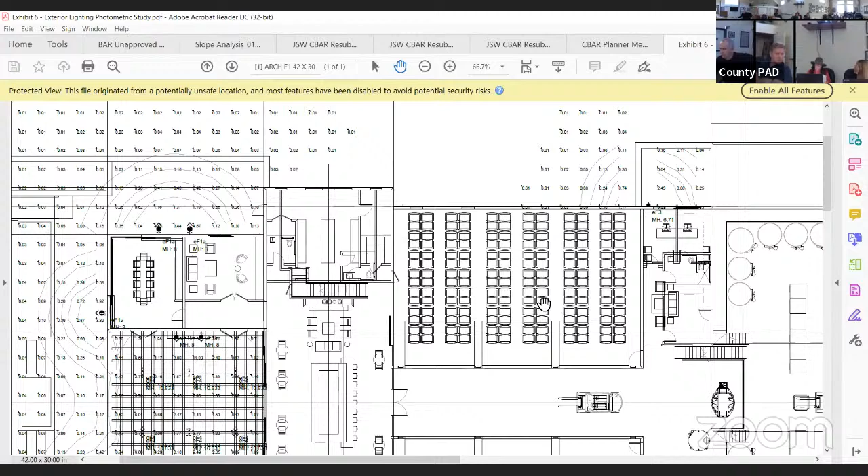Further conceptual. Yeah.

Okay, yeah, so this is actually, I think, where we've taken it to the point where we would contemplate giving preliminary approval. So, I don't know if Tina is here. She is not online, but Nicole? Unless she wrote yes.

So the next step for this project is to go to a different decision maker, the planning commission or someone else? Sorry, let me look at the case type. Is it listed at the top here, or I can look on the agenda? Yeah, so for this case type, the next step would be to go to the planning commission, I believe.

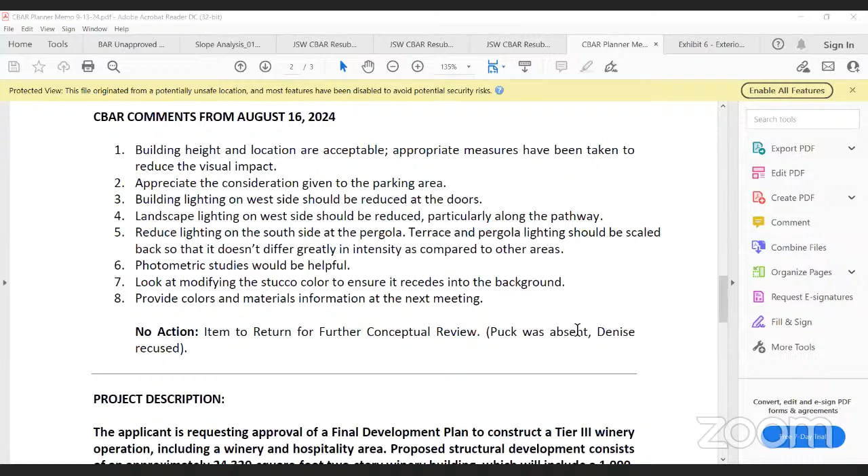You would want to indicate that you're ready to take preliminary action. Yep, I think that's where we're at. I think we're ready to do preliminary, so I think this is ready to go to the planning commission. And I think that's our only comments at this point. Yeah, I think we're good.

Okay. Okay, thank you so much. Yeah, important step. Woohoo! Thank you. Congratulations. Thank you, appreciate it. Thank you. Okay.

So item number 6, 24 BAR 00055, Lupo Tahanian Winery Addition.

Being pretty expeditious today. Hope I didn't just jinx it. Moving right along.

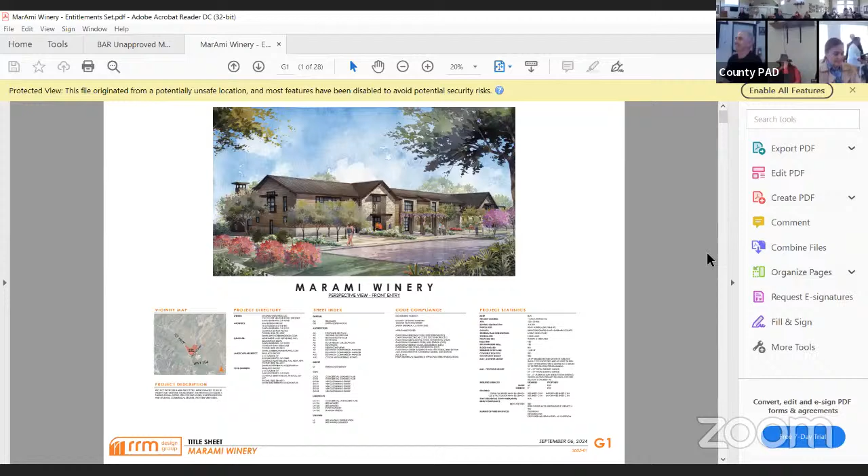It's the conceptual. Oh, that's the thing. Yeah. Excuse me, sorry, I'm not the only one laughing, Kathy.

So the comments from last time were the projection of the tower roof line beyond the ridge line has changed from the original drawings. Bethany, which item are we talking about? Item number 6. I already called it. Did you? Yeah, I called it, right? Yeah. No, sure, go ahead. Yes, I called. Sure, okay, yeah.

The projection of the tower roof line beyond the ridge line has changed from the original drawings. Board prefers the integration of the original. The production portion of the structure looks somewhat stuck on. Encourage you to consider how you're transitioning between architectural styles. There are a lot of different styles being shown. We'd like to see a cohesive design vision.

The landscaping is a lot to take on in this area, and given staff availability, may wish to simplify for ease of maintenance. Trees add a lot of value as far as regulating the environment and the heat. The site would benefit from more shade.

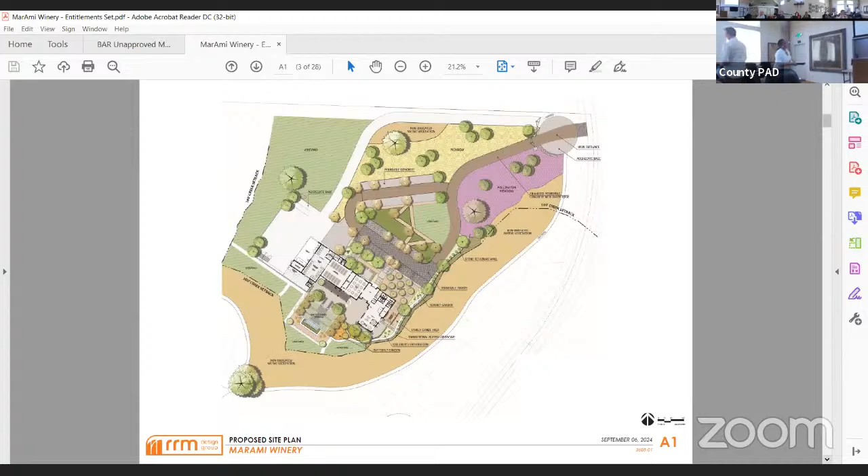I'm with RRM Design Group, and I'd like to start by addressing the comments from our last review. First, regarding the projection of the lower entry tower: we've reduced the height so it now meets the same ridge line as the rest of the building, and increased the pitch on the gable, switching it from a hip to a gable. We've retained the hierarchy of that entry piece by cladding it completely in stone to give it more prominence, with taller recessed entry pieces.

Moving to the next question, the concern was with the production area on the far side of the building. We've revised it to be more integrated with the building using more harmonious and continuous materials throughout. To the right is the production area, which has a stone wainscot at the bottom, the same stone as the entry piece, and a fine aggregate concrete wainscot that wraps around the entire building.

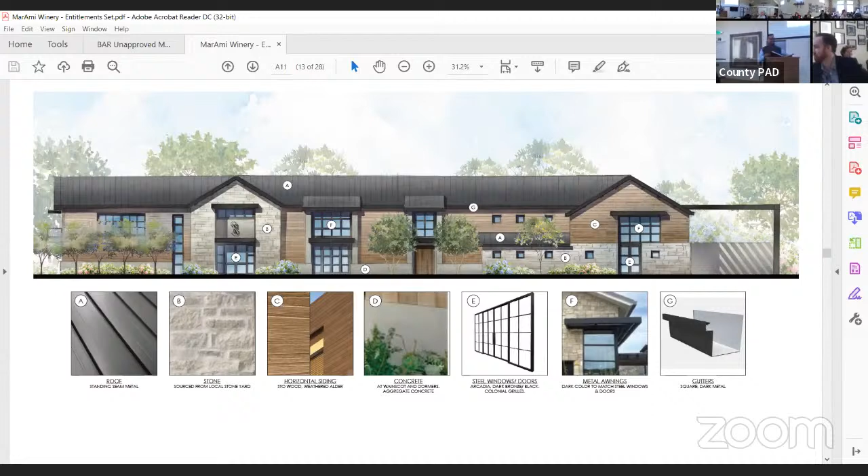There was a comment regarding maintenance, which we wanted to address briefly. The owners, who you've heard from, are experienced property managers who are really committed to taking on a project of this scale, and they are developing a landscape maintenance plan.

Of course, from a landscape design standpoint, we will be looking at maintenance-friendly items as well as water savings, making sure that's part of the final design. So we just wanted to touch on that. Of course, it's a valued project for the owners and something we're taking on from a design standpoint as well.

So wanted to touch on shade, as you mentioned that was a theme last time. One thing we did add to this set here, just to help with that, is a shade study. If you go to sheet 26, which is LA 105, we did put together a series of shade studies again for that back patio. We thought this would be very helpful with the discussion here today.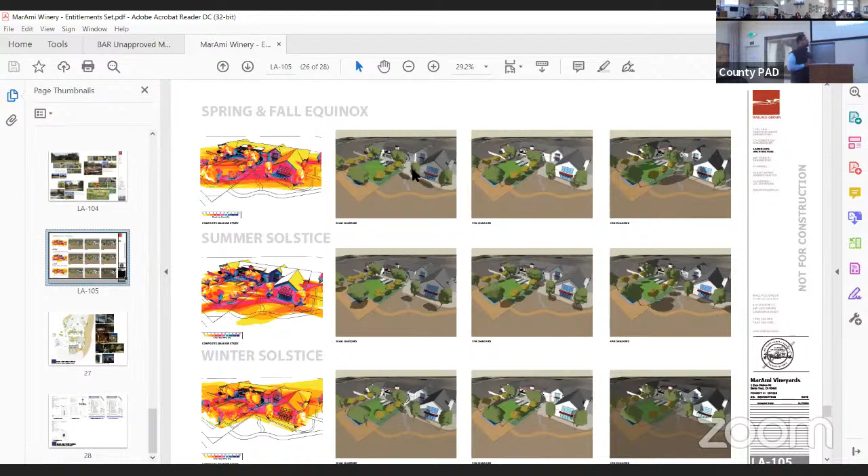We did add in some additional trees from last time, which did help with the findings of the study. Those occur not only in the production parking area, but also in the back patio. And I think one of the critical things here, especially with the summer solstice, you can see in that left image, if you zoom into that, with all the different shadow patterns through the day.

You do get a fair amount of shade in that back area, which is exhibited with the almost purple to that darker blue color there. And if you scroll over to the images to the right, those show some snapshots of the different times of the day. I think this one is winter, perhaps. Maybe scroll up to the summer series. Actually, I think you're right, it was.

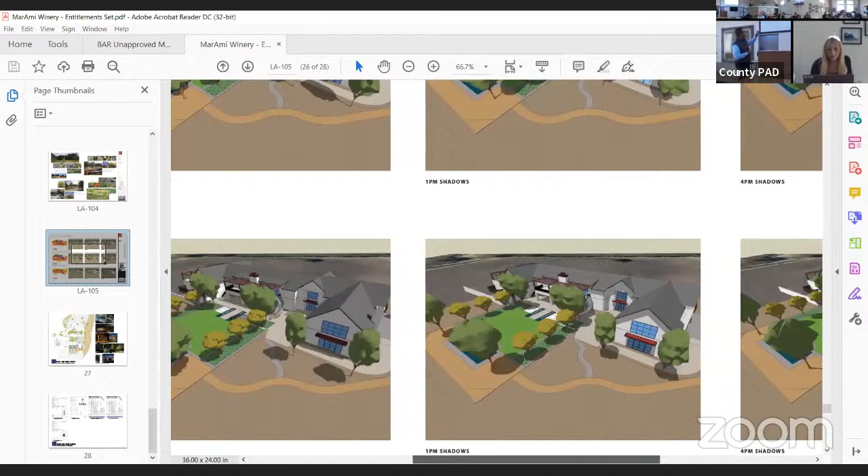So especially with the 1 p.m. to the 4 p.m., you can see how the shadows really start to broadcast into the back patio area, really enhancing and allowing for shade in that area. The other thing that's interesting is on the far right-hand side, where we have some patio space, that is in full shade in the afternoon.

So, of course, we took those comments near and dear and added some additional trees, so thank you for that. But we do feel that you're seeing almost 50 to 60%, if not more, of that back patio, especially the seating area, covered with shade.

There was some discussion about the vehicle turning. So if you go to EX 105, which is PDF 21 of the set, we did include a composite diagram here of all those different vehicles. There is, of course, the bus, minibus, we have a fire truck in there, and also a semi truck. And what you can see, especially on the left-hand side in that production area, is that a lot of that space is needed really for those vehicle turns.

We did study the idea of bringing in some shade, and we did actually carve up that space and brought in some trees to that northwestern edge of that parking lot, which I think does help to add some shade, especially in the afternoon, just getting some shade on that surface. There is a trash enclosure, so there's some additional movements in that back left corner that will be needed as well.

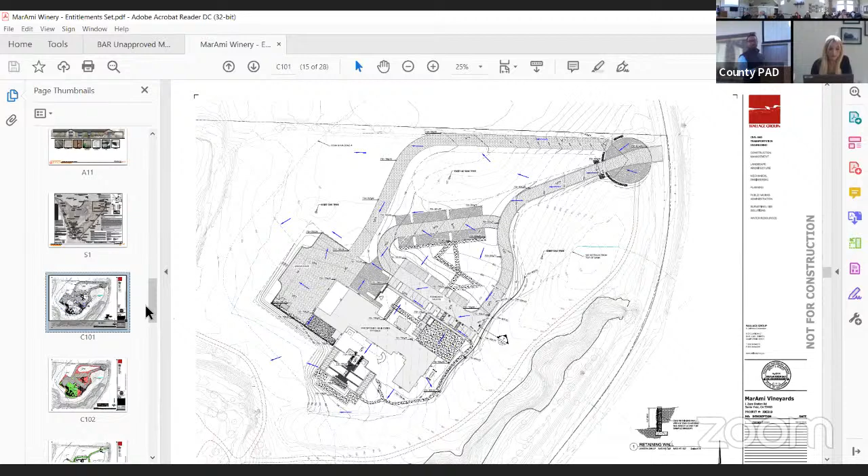And then lastly, in terms of the transitional landscape discussion, we did look at bringing in a transitional landscape buffer. So if you go back to the landscape plan, we can share what that looks like. We added it here on the right-hand side, in that hatch there. If you zoom in, you'll see there is a call out for it as well. Essentially, the idea is, and we have some images for that too, that this is meant to be a harmonious transition to the native landscape there.

We know that there's some seasonal differences to that, some that we want to celebrate. One of the things that's very helpful, if you go down 3 pages to LA 104, that's pretty good to the top left there. You can see we did add in some images, those smaller images below the transitional buffer zone callout, that's the view actually looking out in that area. I think one of the things that is really pleasant are the hills beyond and then the tree line of the creek there. And really that transitional buffer zone is meant to take the eye off the intermediate zone in between, give some buffering, give some staggered planting.

So again, it's a harmonious transition to that, and you see it as really one large piece with trees behind. So we did think about that as well. I thought that was a good comment. So that addresses some of the topics that were brought up in the last meeting that we had with you all.

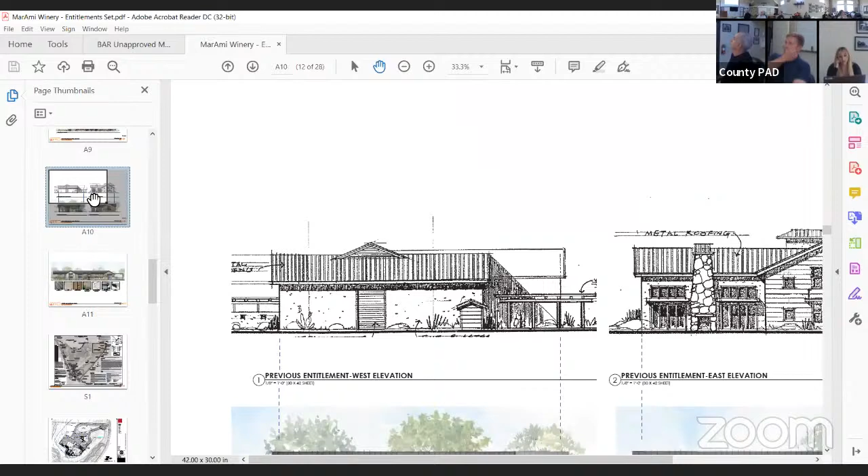And I was curious why there were two different stair situations on the south elevation also. Seems like there's a curvilinear one and then a rectilinear one. That's deliberate due to the heavy use of weddings at this facility and the events we can hold. The brides love to be on those circular stairs for photography, and it also helps break up the rigidness of the rectilinear mass on that upper level, and creates a little bit of drama. We're planning to do a Corten steel or black iron type of curved stair that will be kind of a sculptural piece there, so I think it'll be something interesting.

Well, I guess where my comment's going is, if it's not cost prohibitive, you might even want to duplicate that curvilinear stair and have some really graceful element on that south elevation, but that's a dealer's choice. One way or another, I think you've synchronized the building up to be a cohesive thing.

You will also notice we brought out a dormer shade that's shading the whole second floor. Yeah, yeah, I need to get my comments here. I'm sorry. No worries.

I agree with Andrew. I really appreciate and respect the work that you've done with our comments, and I think particularly for this site, the building mass is moving in a really good direction.

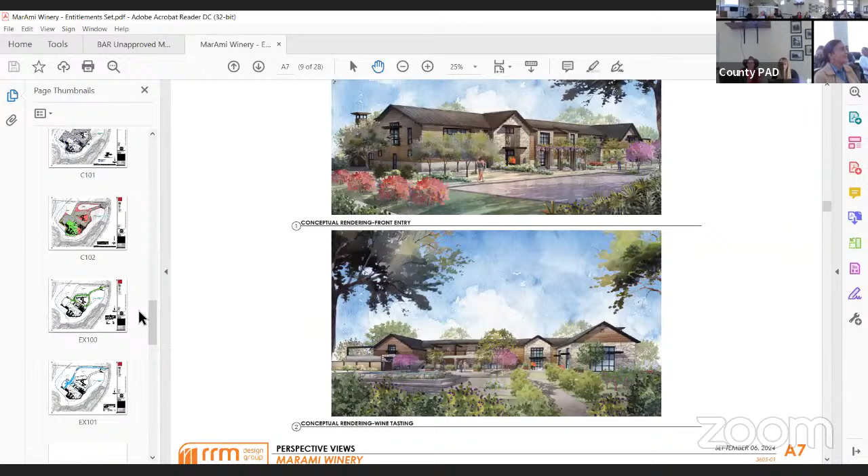So yeah, I'm really impressed. I think you did address, there was a response to all of the comments. And in the spirit of the nitpicky things, I really wish that back area could be broken up in the center with a big tree, where you've got your turnaround for your buses and all that kind of stuff. I know you've got one bus that zips right into the middle there, so I understand the constraints, but if we're looking for Christmas, okay. So if I had my wish list, I'd just do the landscape plan. And it's this area in here, or you had one bus that marked right up into the middle, but something in the middle there, I think, just to break that mass.

We looked at it a lot. I understand, you spoke to it. Yeah, this is just me cherry picking. But I think the takeaway here is that we all appreciated the fact that you looked at all of the comments we made and have brought back your responses to all of the comments we made, and that this looks very good from our perspective at this point. And yeah, I think we should talk about our story pole.

What do you want a story pole for a site visit? Major ridge line and corners. I mean, I don't think it has to- can we go to- it's a pretty simple structure, really, it's a rectangle. We don't have to get crazy with corners, dormers, corners and height.

If you go to page six, it's the roof plan, might be a good one. Yeah, I looked at that one too. Okay, this will work between the two. So, A4s, yeah let's do the roof plan, A4. Don't do this one, just- it's a massive file. It doesn't like me today. It's almost, no, almost, there we go. There you go, that one. Yeah, that's easy.

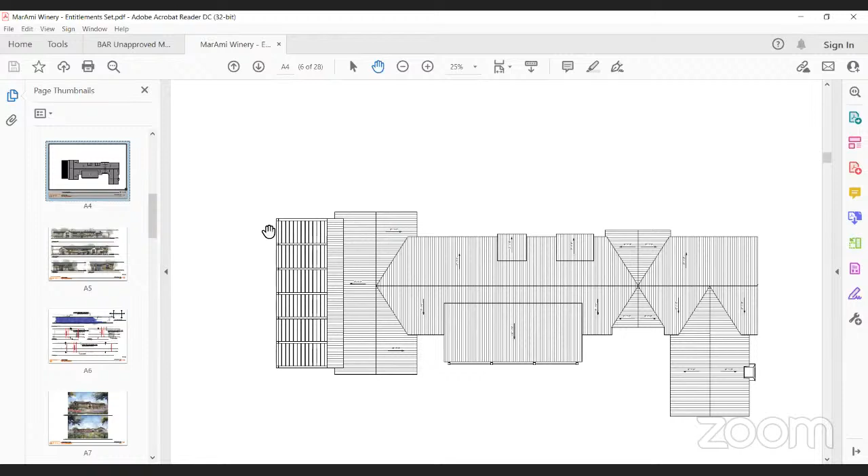Hi Bethany, this is Francisco with County Planning. Just want to clarify, this will not be going back to Planning Commission, this is an SCD, just wanted to clarify that. Thank you for confirming that, Francisco, I appreciate it. No problem. Good, okay, that's perfect, so everybody's on the same page.

Yeah, so that'll be fine, so just coordinate with Francisco about the site visit and everything else, because he'll need to get you on Teresa's agenda, especially for the site visit. You wanna be first.

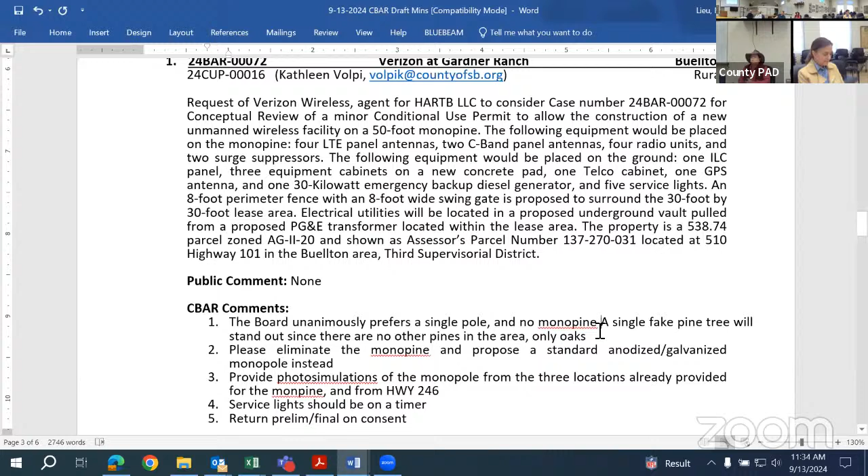And then you can combine the last half of 2. Period, and then take out the rest of that. Single, standard, anodized, blah blah blah. You could say the board unanimously prefers a single, anodized, galvanized monopole. Prefers a single standard galvanized monopole. You could say pole instead. Galvanized pole.

So, many photo simulations. I think you could say update the 3 photo simulations to reflect a pole. I think the first one's still weird. Does that matter? We'll come back to it in a second. I'm sorry, my brain got ahead of me. A pole and add photo simulations of the pole as viewed from Highway 246 and 101. No, I already got that. Update the 3 photo simulations. Those are from 101. Oh, that's right, they didn't have 246.

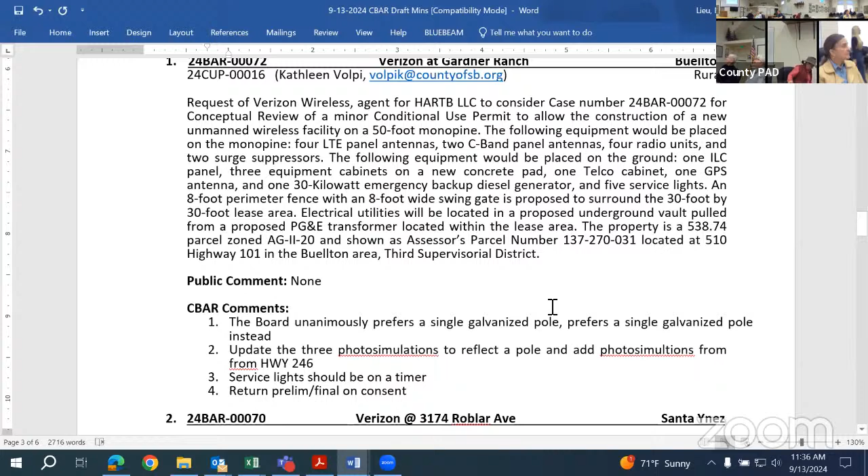Well, and, okay, yep.

Quick question to the board. When we were talking about the finish, I was envisioning we were talking about colors for the whole apparatus, including the antennas, but did I actually say that? Okay, so I won't put that in there.

Are we done on this one? Yeah, because I didn't actually say the whole thing. Okay, yeah. If fence, we're on the next one, number 2, yep.

Provide fence detailing in keeping with an agrarian form. That's fine.

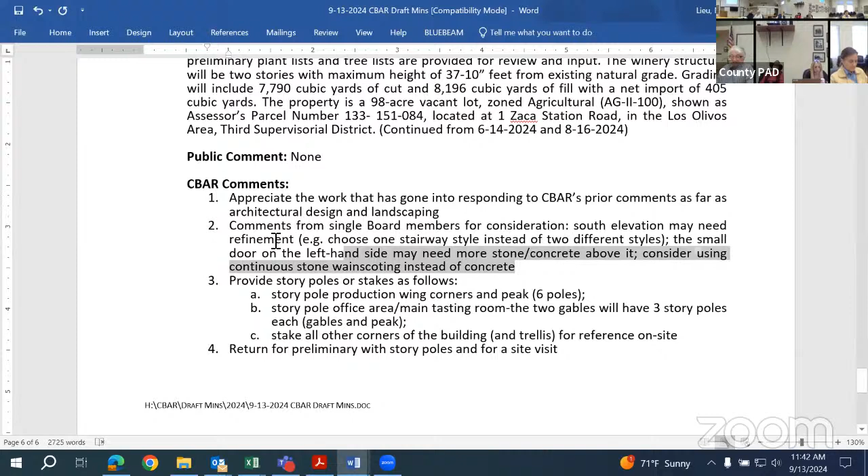In this case, there are multiple single board members that made singular comments. So normally we don't say comments from a single board member. At this point, we just drop it. I wouldn't worry about it, really. Take it out, because they've heard it. Yeah, they've heard it, but I don't know that it needs to be memorialized here. So I'll take out number 2, actually. That's fine, let's see what they come back with, because that's usually what we do.

Yeah, okay, I think we're good. They got the points. Okay. We put it at 12.